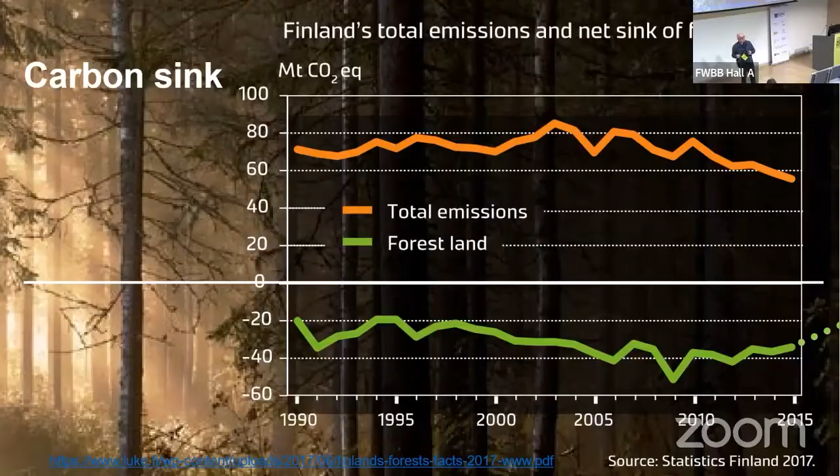This slide shows the 2015 situation. I was wondering what was going to happen to our carbon sink after that. This is now the most recent data I have, and you can see that already in 2018, there was suddenly a lot more wood taken out of the forest than was expected by these projections.

Very interested to know what's going to happen this year, because now, as you know, we are no longer importing wood from Russia into the Finnish saw timber industry, so that will definitely have an impact. Last year, the price of wood went really high, so there's a lot of interest in exporting it to America. So let's see how well we can actually maintain that carbon sink in our forestry.

Luckily, that is more the role of our Ministry of Agriculture and Forestry. Our job in the Ministry of Environment is promoting the demand for the use of wood in construction, but we need to always be aware of that upper level. So in our Department of the Built Environment, which is also in the Ministry of Environment, we're doing everything possible to bring down the emissions related to the construction industry.

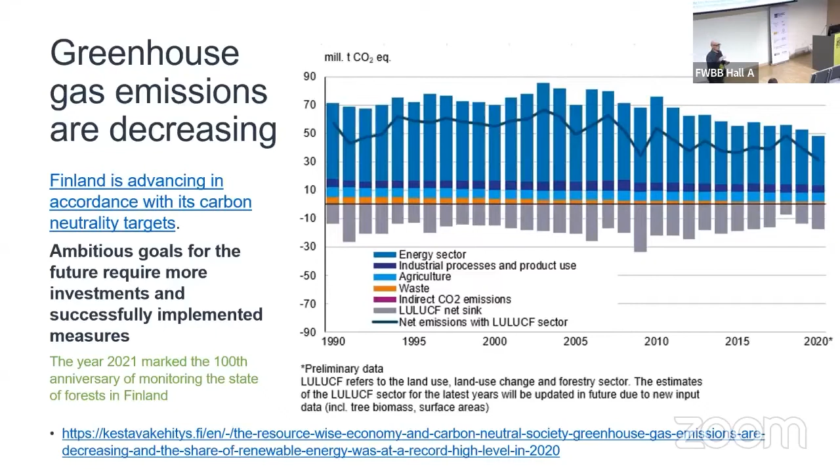That has very much to do with the energy efficiency of buildings, energy efficiency of energy production, but also the carbon emissions related to construction materials. That's why we are both promoting the use of wood, which makes great sense since Finland is very much based on the bioeconomy, but also trying to control the emissions of the construction industry by bringing regulations for low carbon construction, setting limit values for construction.

Our work, well, I'd say in yellow, I've put where mostly our work in our wood building program is focused—particularly increasing the use of wood in urban development, trying to support productivity in wood construction. We do some communication work. We have a lot of information coming in and out of our department, and the communications part is very important and very difficult.

Particularly we're looking at tools and methods for calculating carbon storage in construction, and of course we're also doing work promoting circular economy. We're working together with the Ministry of Environment, Ministry of Economic Affairs, Ministry of Agriculture, Ministry of Transport and Communications. So there's a lot of coordination work that has to be done between different ministries if this is going to have any kind of scalability and any kind of large effect.

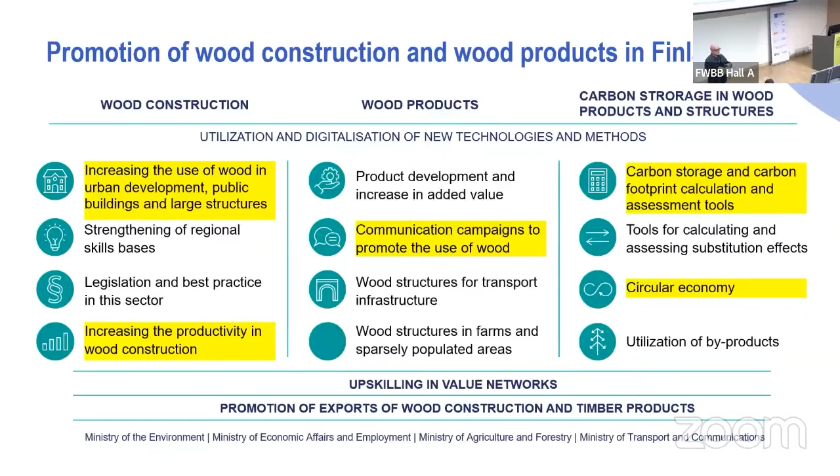There's a nice word in Finnish, toiveiden tynnyri. It means a barrel of wishes. So when we talk about using wood in construction, there are so many great wishes and expectations that are often very difficult to realize. But these, I think, are very important for us, and it is the reason why our work is splintered into so many different directions at one time.

Of course, the bottom line is sustainable forestry. And you can have a long debate today about what does that mean? How do you certify it? How do you find chains of custody? How do you protect the future? What is sustainable forestry? Luckily, that's not my job.

But we do a lot of work on understanding carbon storage and low carbon construction—basically the rules and regulations for how do you estimate it, calculate it, prove it, certify it. A lot of work has to be done, particularly in the timber industry in Finland, because it is a very splintered industry with many, many medium-sized companies trying to get some kind of ecosystem going of how they collaborate, how they get systems efficiency.

So industrial quality and value creation is very much important. When we talk to municipalities and politicians, of course, it's about local economy. They want to know where are the companies, where are the jobs, where's the money from, where's the tax. So we have to understand the needs of the politicians and bureaucrats that we deal with.

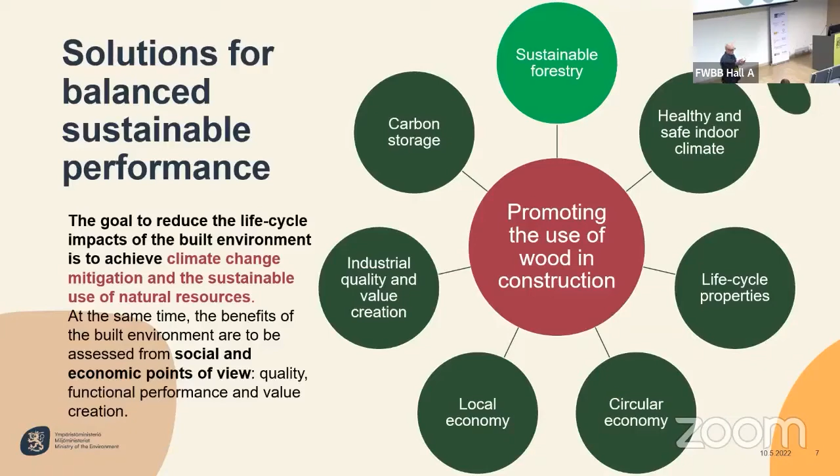So how do we respond to all of these things if we talk about dealing with people? We have many, many different actions. Particularly important for us is the whole idea of green public procurement. As a public authority, we can't force local authorities in what they do. The state itself builds only a very small amount of new properties, but we can support the competency with green public procurement.

Of course, as I say, they need to look at different roadmaps for low carbon construction, trying to understand how to influence local governance. So it's not so much top-down, but it's more about developing consensus, getting local municipalities to develop their own strategies.

Then understanding multi-story housing systems. If we talk about the scalability of what we do, the multi-story housing is probably the most important target, certainly for us. If we talk about creating more bulk from wood construction, the scalability and the industrialization is very much related to that. But at the same time, it has to be much more human-centered.

So that is incredibly important, whether it's renovations or indoor climate, whatever. And then also we are very interested in social and healthcare. It's a very difficult market to get into or to promote, but certainly we hope that there are actions we can do to support it.

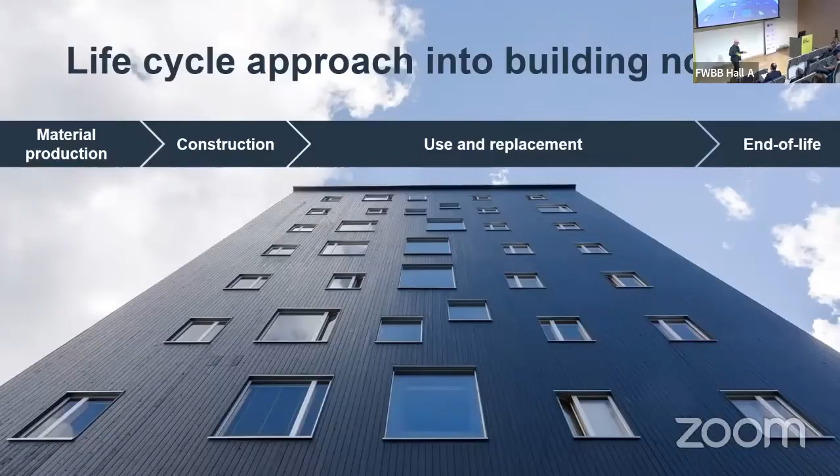Luckily, we do have a broad consensus around the whole idea. We don't have consensus about use of land, but we do have some consensus about the properties of buildings. So this means we are introducing carbon footprint calculation based on standardized calculations, which you can use all over Europe. The methodology is standardized, but the application is not necessarily standardized. It has to be understood, localized.

And then we've also introduced the idea of carbon handprint. I don't know if the term is useful, but the idea is that the footprint is, say, the negative impacts of construction, and the handprint should be the positive impacts. So it means we find what are the climate benefits - it could be renewable energy production, carbon storage, carbonization of concrete, etc.

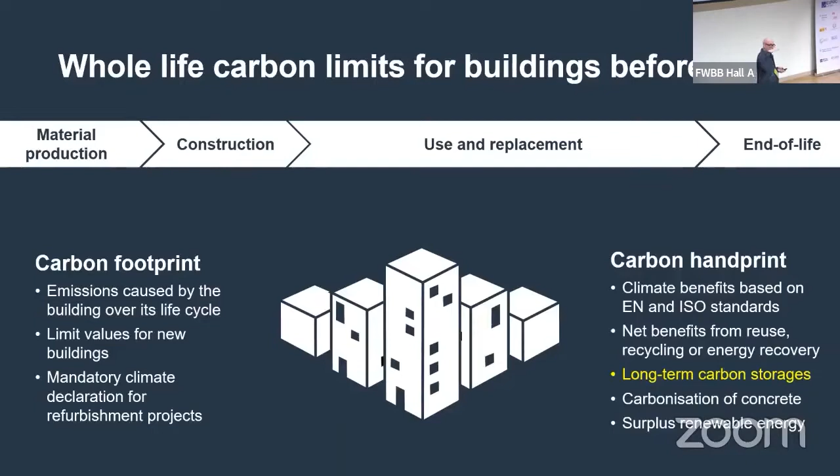We need to go away from a negative view of construction to trying to encourage the positive views. This is not always easy. Maybe I'm too cynical myself, but anyway, we can put laws about putting limit values on carbon footprints, but what do we do about the knowledge about carbon storage?

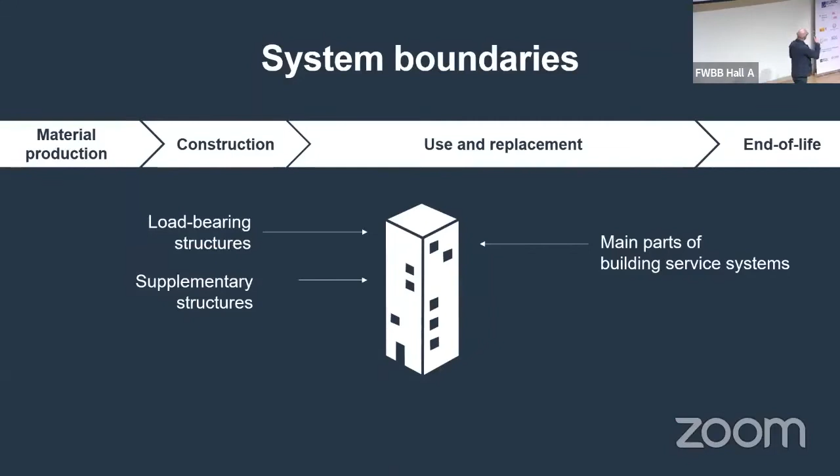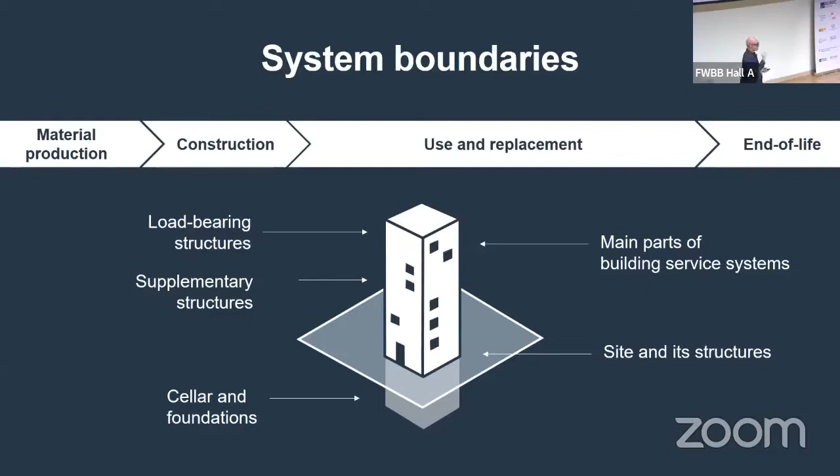You could be given a very bad site, which takes a huge amount of concrete to keep your building up, or you could have a great site. So we do calculate it, but it's not included in the limit value. Otherwise, it becomes unfair because the city often will determine what site you get. It has to be equal.

So this is basically running through the standardized calculation methodology for life cycle analysis. We include all the parts. I know, for example, in Sweden they just look at material production and construction phase for a material passport for the building. But in Finland, I think it's important that we understand the whole life cycle of the building. But that does mean that in the gray areas, there's lots of information that might have to be done with default values.

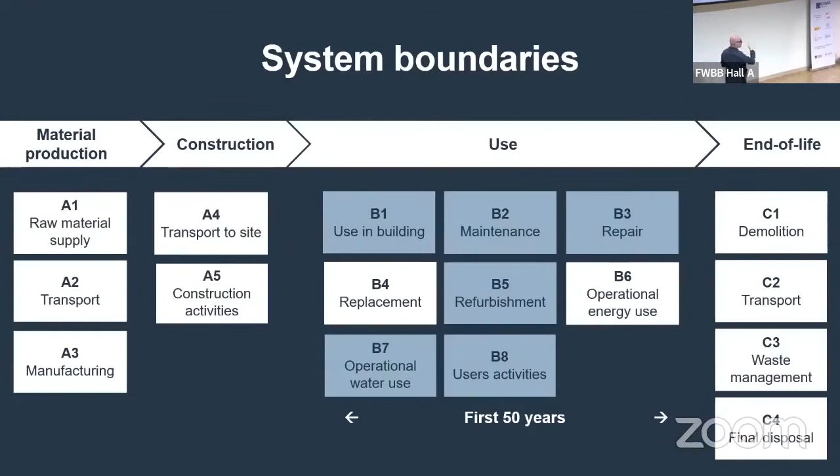An important part, I'd say, is operational energy use, because we assume in the calculation the decarbonization of our energy supplies. Because if you're looking at the next 50 years, we better be sure that the production of energy has lower carbon emissions. And that means there's more emphasis on the production of buildings, so the material properties of buildings become more and more important.

We have, I'd say, the essential tools. We have the methodology defined. There's now been new comments about have we got it right from the point, let's say, for our stakeholders? My colleagues are now writing the legal text for how to apply that. Then providing generic data so we can make comparable estimates of buildings' life cycle impacts. And then definitely needing to support the digitalization so we can collect the information more easily from buildings.

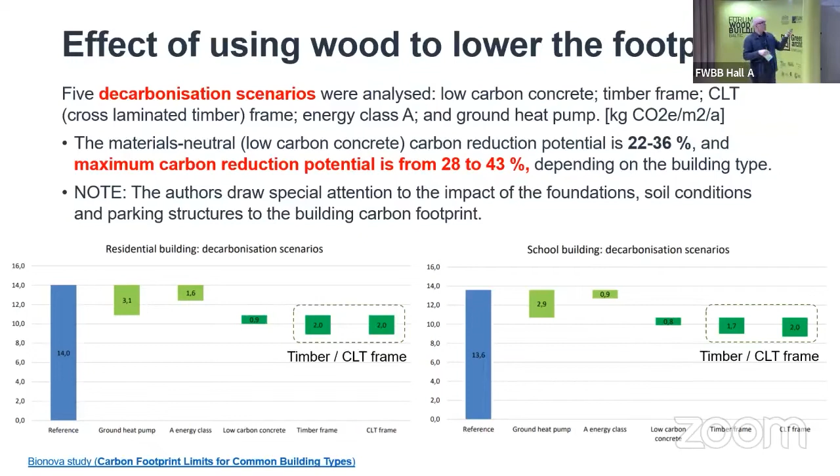And then we've been trying to understand what is the right kind of limit value for buildings. So our colleagues here at Bionova looked at different scenarios - they have a reference scenario, what is the basic carbon, the typical carbon footprint for buildings, and think how much can they typically bring it down if they use low energy solutions, how much can they bring it down by using ground heat pumps.

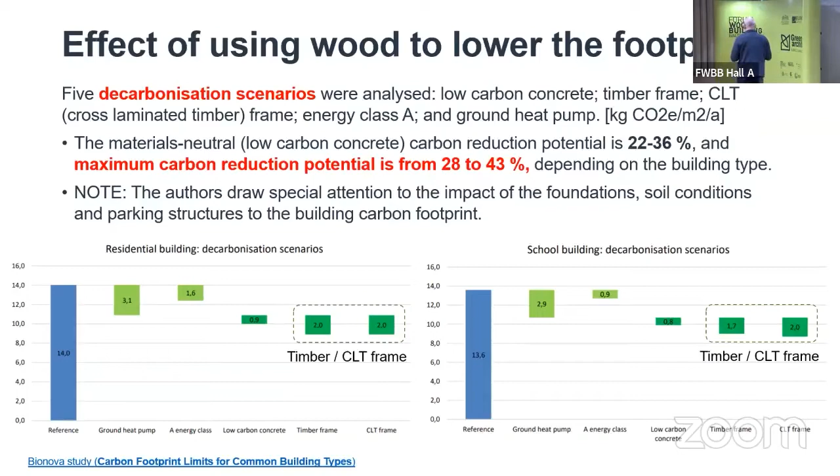I can bring it down a bit. How much can you bring it down using low carbon concrete? And how much can you bring it down by using timber? That means you can bring anything up to like 28, 40%, 43%, depending on the building types and also depending on the ground conditions. So we're trying to find what is some kind of cost optimal, realizable, feasible carbon target.

Talking about carbon storage, I'd say it's quite a big issue. It's best to look at the full reports if you want to get into the real nitty-gritty questions. But let's say that in Finland, we have so much forest, we absorb a lot of carbon every year. We have a fairly large amount of wood already in our built environment, and we have to try and make some estimates about how much typically a wood building can contain in carbon.

There are very big differences, but you need to have some kind of generic values. Of course, the bottom line here is carbon storage grows very slowly with current building activity. So repeating the question, we're not going to save the world by building from wood, but we need to understand the mathematics and numbers behind it.

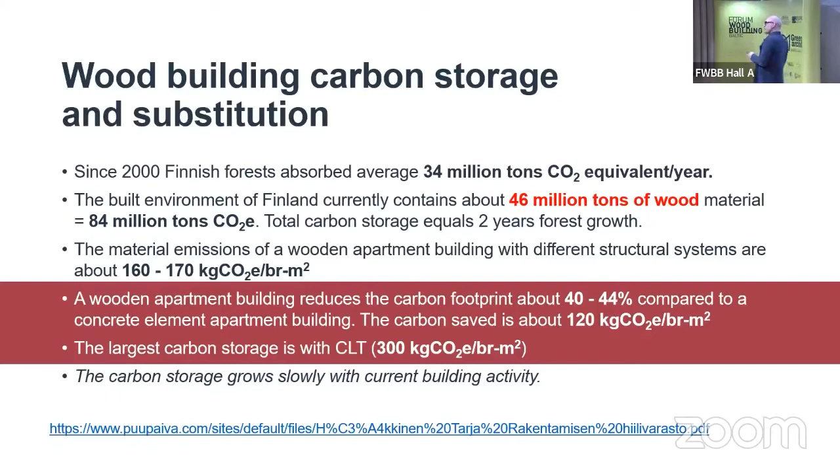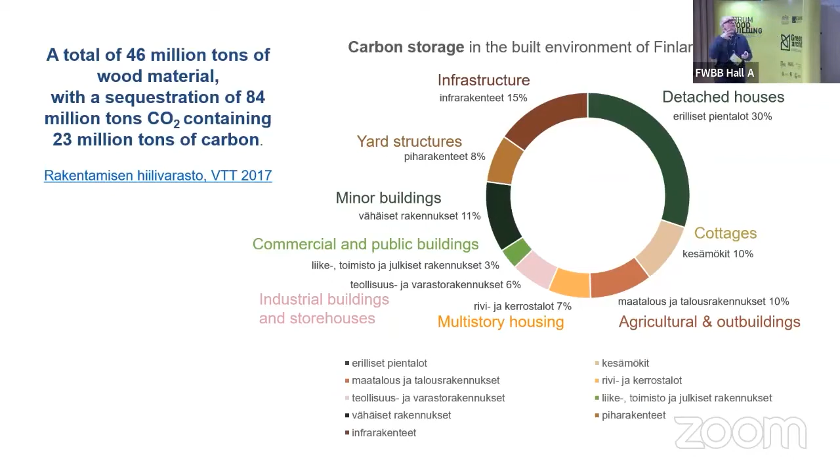This is an analysis done about 3 years ago, trying to understand where the wood is in our wooden construction in Finland, mostly in detached houses, small individual houses, because sometimes wood building has something like a 95% or 98% market share there. But if we look at multi-story housing, it's only like 7%, and commercial public buildings maybe only like 3%. So these are where we really need to make an effort, and it means political effort, in getting more growth in these larger projects.

So yeah, there's a lot of effort trying to understand the significance of handprints and footprints. I'd say the main issue is that it's kind of related to the idea of carbon neutrality, but I think carbon neutrality should be looked at on a whole national state level. You can't look at one building and tell me that it's carbon neutral, because you've done a lot of emissions to make that building anyway.

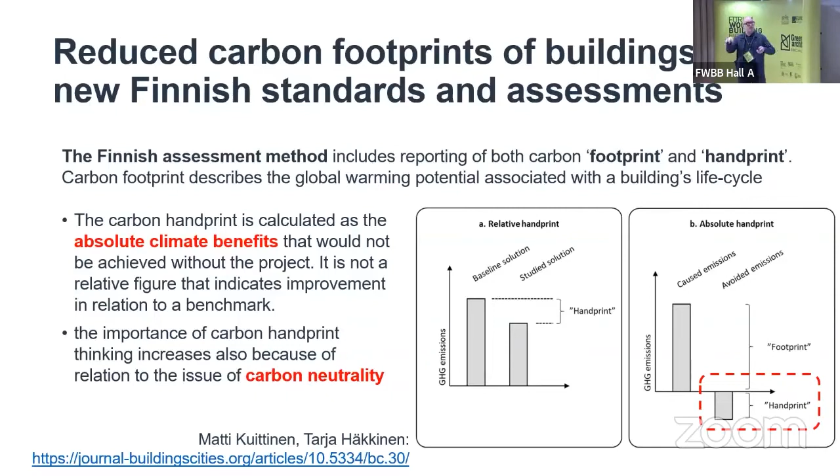And where you assume the benefits come from is kind of like a mathematical assumption. So we really need to look much bigger to understand carbon neutrality, because it means an ecosystem of so many different moving parts. But it's an important part of the argument for wood construction.

Too much small print in this. Let me just pull out the main points. Firstly, we need more scientific results. We need much better science about understanding carbon storage in construction. That's incredibly important.

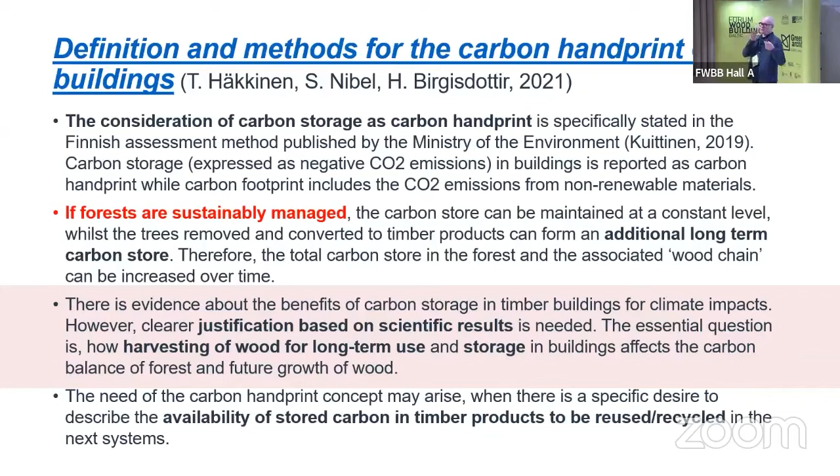How does harvesting of wood affect the forest and the long-term structure? But it is also good for the idea of having stored carbon available in timber products. So it's a big question about what products are containing wood, which products we're using in construction is very important. Not just making big assumptions about how many multi-story buildings we should make, but about which products are actually being used, and where the carbon is actually being used in construction. Understanding the anatomy of buildings much better.

So back to what we're doing in our wood building program. We have very ambitious targets - the idea that we could have up to 45% of all publicly procured buildings from wood. This is a very, very difficult target. I really don't think we're going to meet it, if you think about the disruption in our markets in the last 3 years, and the amount of activity in construction.

Municipal authorities are very nervous about where they put their money. Are they going to make an investment decision? Are they going to take the risks? So the market is definitely quite unstable. But it's still important that the ministry has these targets, that we come out with these targets, because that definitely encourages local authorities also to come up with the same message.

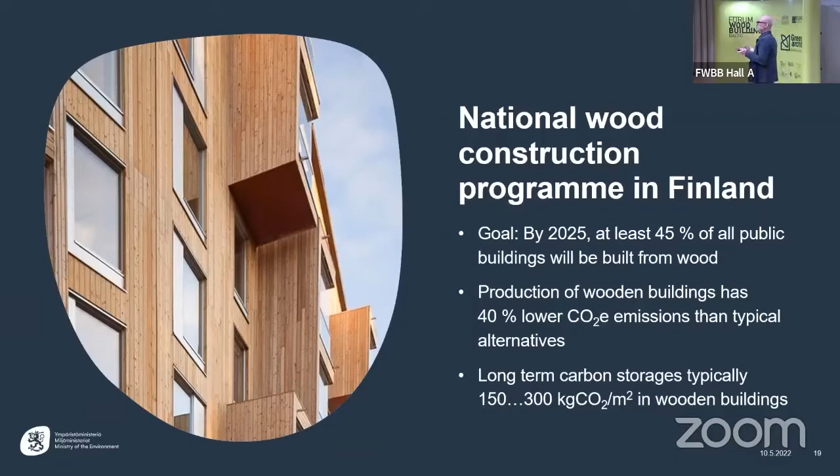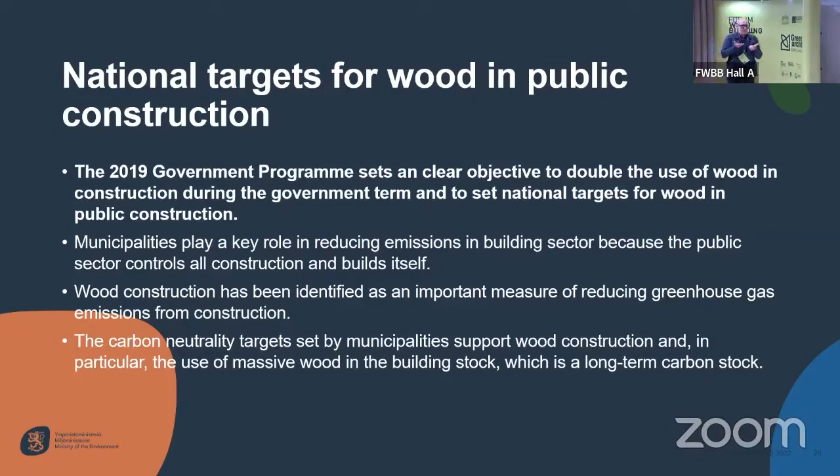So yeah, this was 2019, before coronavirus. We set these targets, but I'd say these targets are feasible and they're definitely optimistic. I feel that there's a lot of risk in our ability to reach these targets, but it does mean that we do need to support municipalities, because the municipalities are the ones controlling planning. They have the competency to deal with building permits. They're definitely implementing these strategies, but we are trying to at least create a positive vision, let's say.

Too many numbers here, but let's pull out some. Education buildings - you've seen many great examples of very nice wooden schools in Finland. It's definitely a very good market for construction. Each building in many ways is kind of a unique product, and the flexibility of building with wood suits extremely well to education buildings.

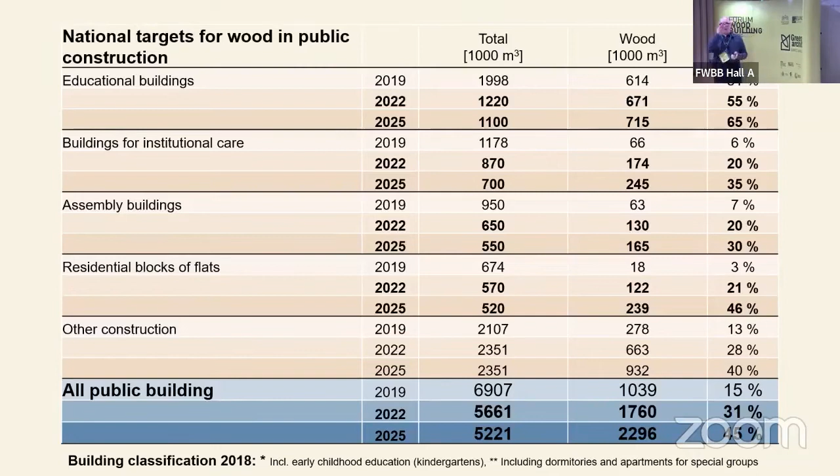Residential blocks of flats is a very small percentage, and I think these are very ambitious targets. I did a calculation that in Finland it would mean about 20 typical-sized multi-story buildings in a year. That's not impossible, and these are just by public authority using public money. But as I say, very ambitious targets.

Even if the target is so ambitious, what is the impact? If we weren't using wood, the emissions related to the buildings, the use of building materials, would be even higher. So already we are bringing it down a bit by using wood.

And even if we push the market segment up really high, this is like 45% of all that, it's still fairly negligible. I wouldn't say not negligible, but it's a fairly small, slow process. The reason these are coming down is because we're building less and less each year with public money.

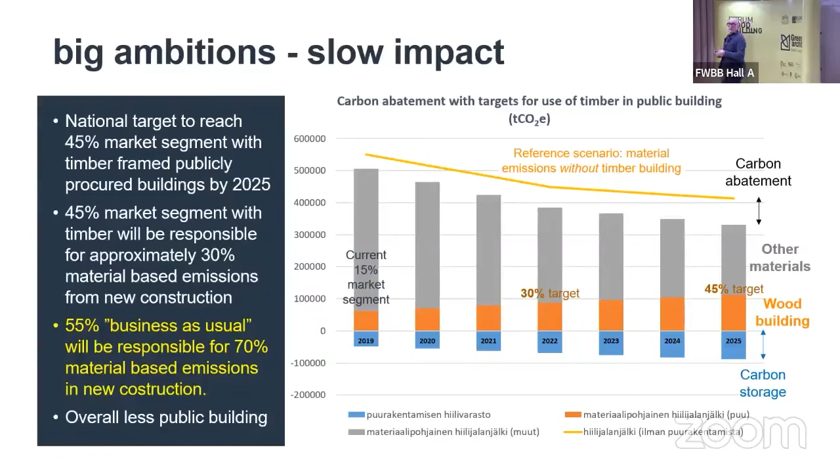But for me the big problem is that this gray segment, building that is not using wood as a structural frame, is still dominant. It has the dominant effect. So this is why we need our low carbon construction regulations if we want to have any kind of effect on this typically concrete segment of our markets. We need to both be promoting wood and bringing in the low carbon regulations.

Luckily we have many different collaborators. As I say, my job is to make myself redundant. So we have Motiva, an agency that has a lot of experience in teaching about energy efficiency. They are also supporting us in helping municipalities understand wood construction.

Keino, we have networks introducing more innovative procurement procedures. They're definitely helping us. Then of course we have our Environmental Institute, Natural Resources Institute, and also a lot of research. I think this is quite an interesting project, this Knock on Wood.

It's between Finland and Sweden, understanding how you control housing demand, housing supply, and local governance, and how that affects the market. So you need to understand the things, and you need to understand the people, at the same time - how do they work together?

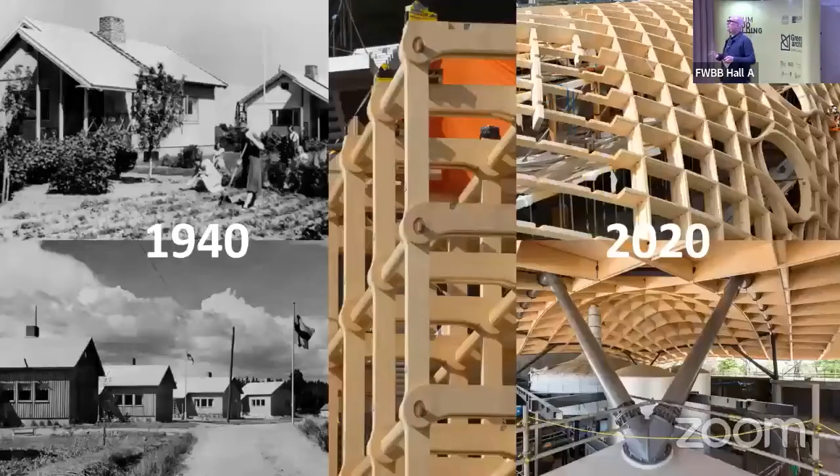Our evolution has been great. In the 1940s, Finland was exporting little wooden houses all over the world. Now, well this isn't in Finland, but we are definitely on the front line of the international digitalization of timber construction, etc. So I'd say there's a fabulous evolution happening in wood construction.

Actually, I think I have quite a few of your buildings here. There you go. This is not sponsored by Puurakentajat, but anyway.

So definitely there's a symbolic value attached to these kind of flagship buildings. It's very important for the positive political image of Finland as a country of wood building - whether you're arriving at the airport, or Stora Enso, or Wood City, we can talk about Helsinki Central Library.

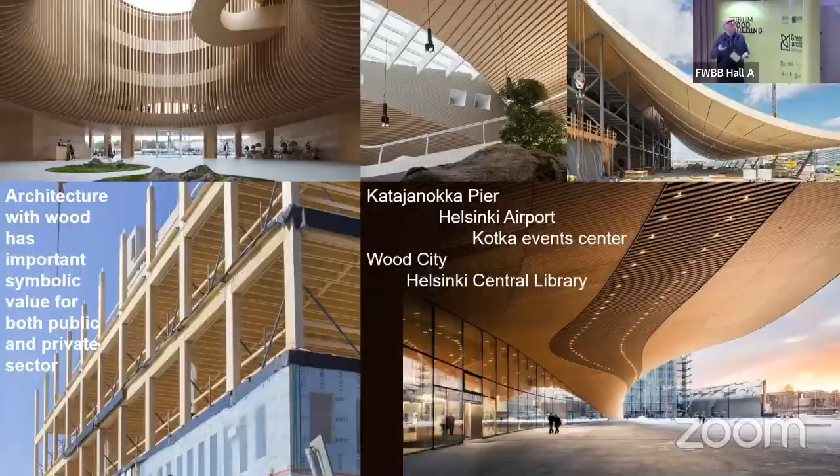This is - you were talking about this great structure now. So we have great flagship projects, which are great for the architecture magazines, very important for the image of the country. And at the same time we're trying to keep track of how many buildings are actually made out of wood - the kind of ordinary buildings.

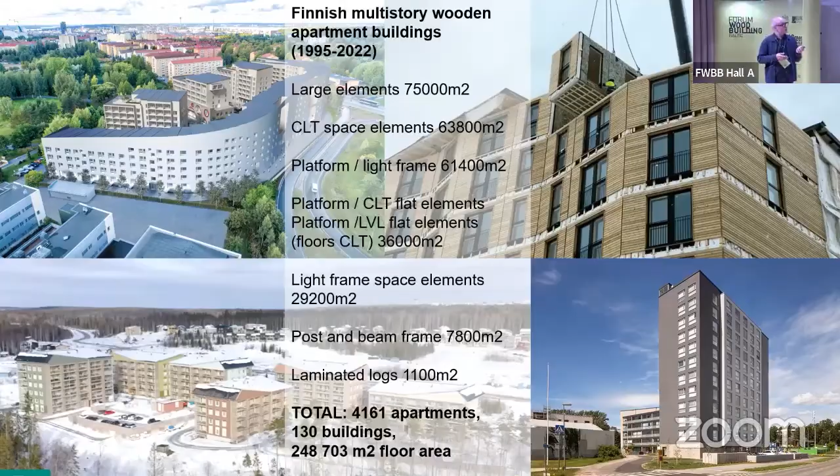So what is more important for the public? If the wood is completely hidden, what does it mean to them? Oh, it's got a great carbon footprint - what? They don't understand what the carbon footprint means. So the symbolic value is of course important as well.

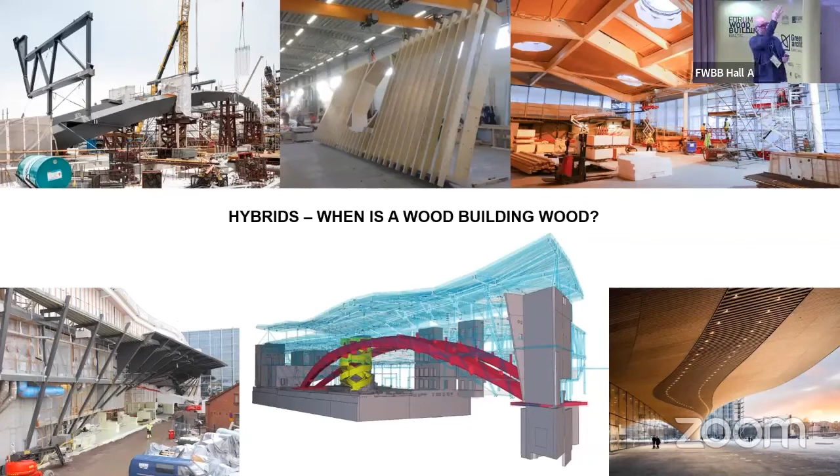Companies come and go, bankruptcy for some, success for others. Some property developers may be taking money from their clients. So we definitely need to keep an eye on quality of construction and the reliability of wood, because if we just make great environmental promises, but we don't deliver a trustworthy business, then we lose credibility.

The view from inside of my work, we have this huge range of different research projects touching so many different topics. And we could actually give, each one of these words represents a very interesting project. So with 100 research projects, we have an amazing network of competency. It's great to provide support to universities, to research institutes, to get young students doing their diploma works, their master's thesis, their doctorate thesis on a subject.

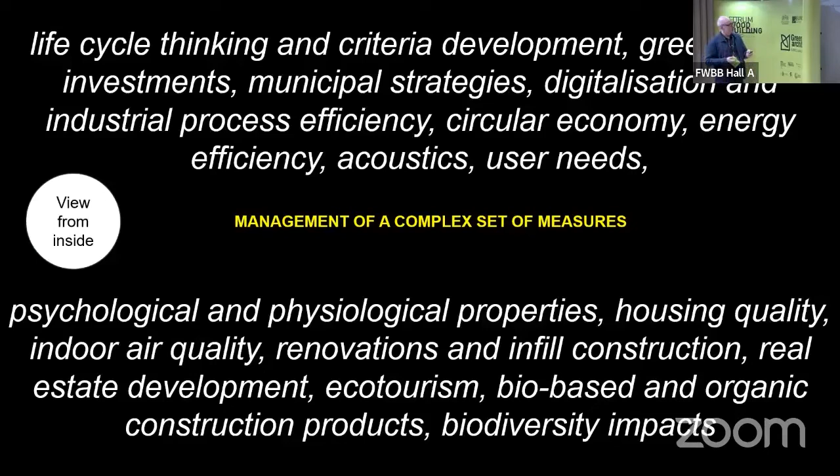Very important that it's slowly happening. And if it looks a little bit chaotic, I can see it myself in some kind of map. So this is a list of all of the main environmental assessment criteria used for buildings. It kind of covers the ISO standards, the key performance indicators for buildings. And I'd say our projects pretty much touch almost any one of these criteria for assessing the sustainability of construction.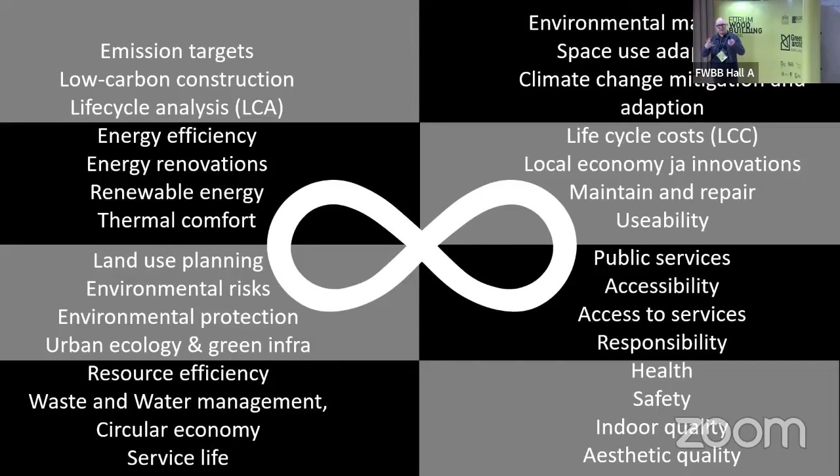They represent certainly the dominant solutions which we are trying to promote. So low carbon solutions, energy efficient solutions, environmental protection, sustainable use of natural resources, adaptability of buildings, resilience of our built environment, life cycle costs, operating responsibility, promoting the health and safety of building users.

These fit themselves into basic categories of sustainability: climate change, natural resources, economics and society. And I find in my work, I realize that this stuff, climate change, natural resources, is very much science-based. But then economics and society is about politics, about values. So we really need to find ways to change our society, because we're trying to deliver better value, better performance, better quality, but reducing the life cycle impacts. Not easy.